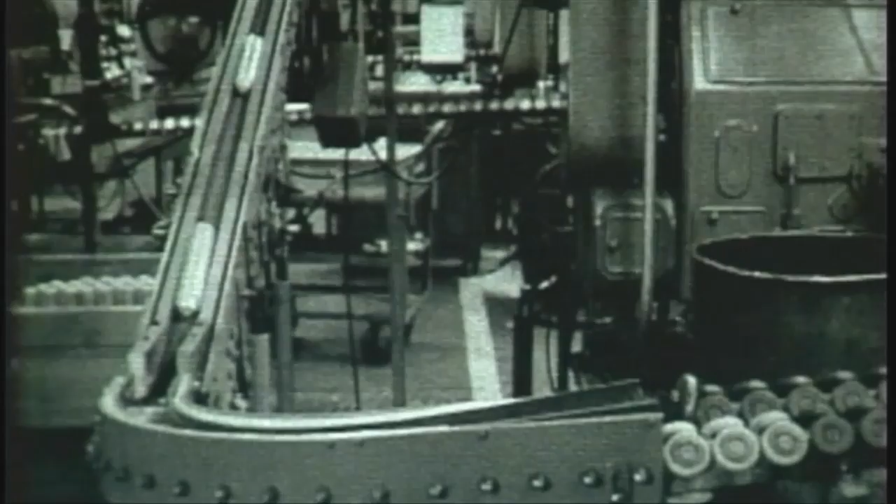We have a little bit of history here of Hanford and the issue with groundwater. A lot of people don't realize that a lot of the contamination that has gotten into the groundwater here at Hanford is due to purposeful release of contaminants to the ground back in the 40s and 50s when Hanford was an operating facility. About 450 billion gallons got put into the ground because at the time they didn't believe it was going to affect the environment - they thought it would just get hung up in the earth. Unfortunately, that was not correct.

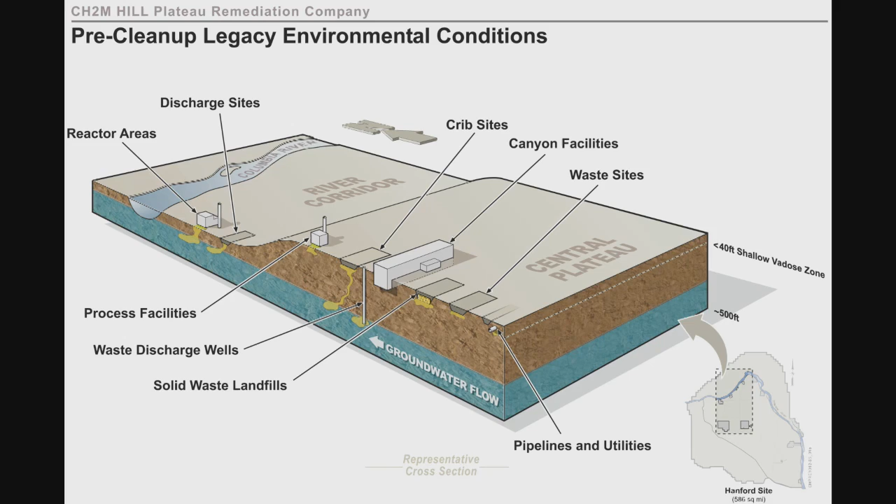A lot of that contamination has made it to the groundwater. It came through a number of sources. There were wells that purposefully injected contaminants into the ground. There are things called cribs, which are big open trenches where water coming out of the process facilities was dumped. This percolated through the ground and over time has reached the groundwater, which in this area is about 250 to 300 feet below where you're currently standing. It's created quite an issue, but that's a little bit of background on how we got to where we are today.

So this is a bit of an overview of the Hanford site, and this is the Columbia River - one of the primary things we're in the business of protecting, cleaning up these contaminants so they don't affect the Columbia River. Currently, you're standing in what's called the 200 West area. We're about 5 to 6 miles from the river, depending on which way you go, and a couple hundred feet above the elevation of the river.

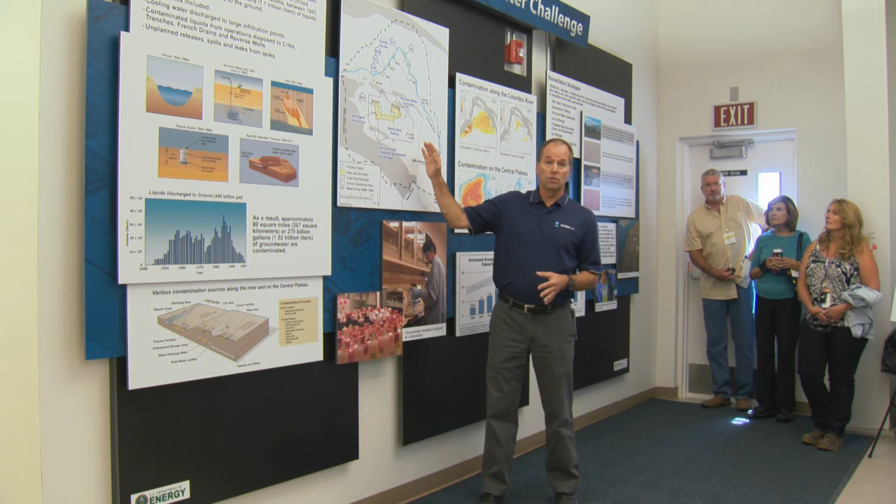As I said, the groundwater starts about 250 to 300 feet below us, so it's almost at the river level here from the plateau. Today I'm going to be talking to you about the cleanup effort we've got going on the 200 area plateau, but we also are doing cleanup along the river. I'll touch on that a little later in this tour - we've got 5 additional plants, so 6 plants total: the one you're in today, and 5 more along the river. Those are right at the river, cleaning up contamination that was caused during reactor operations from the 9 reactors that had operated along the river.

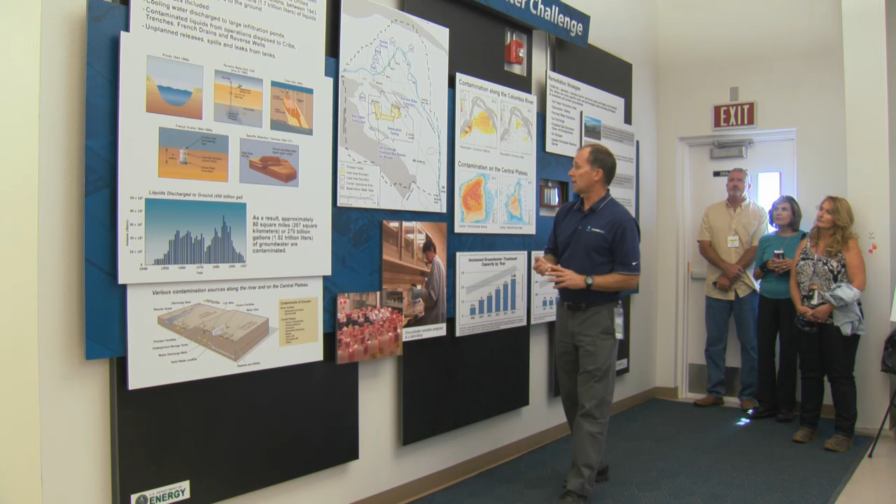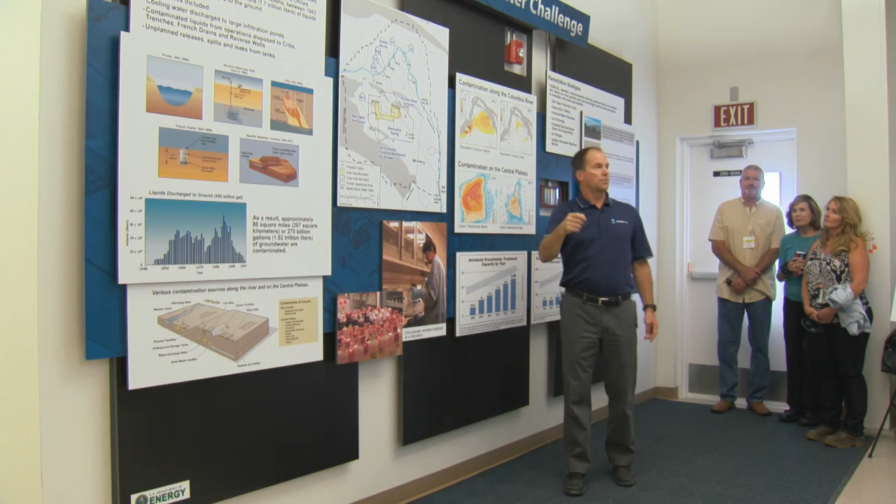So here's a bit of a chart, a cartoon, to depict the contamination we have. It's broken into 2 halves - this is along the Columbia River. What it's depicting is the way the contamination was determined to look back in 2012, when we kind of started a lot of this effort, or as we got into it. This is based on sampling, drilling wells and sampling the wells, getting actual data so we're able to determine where the contamination is.

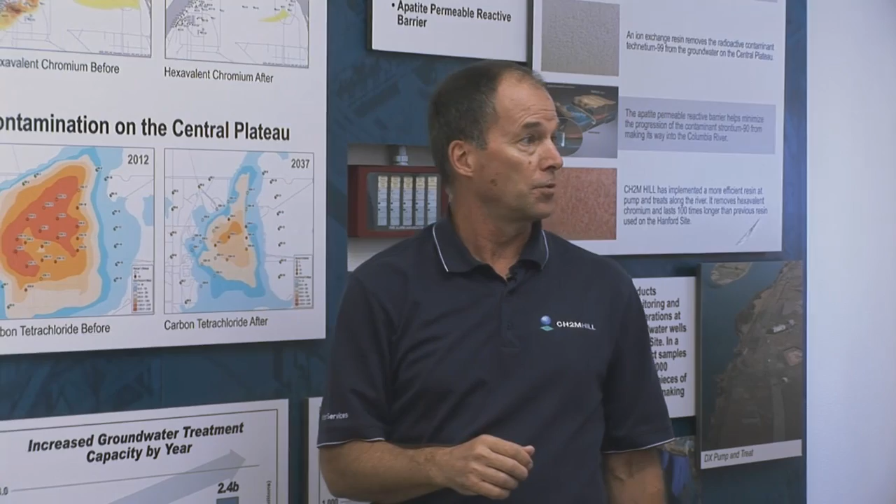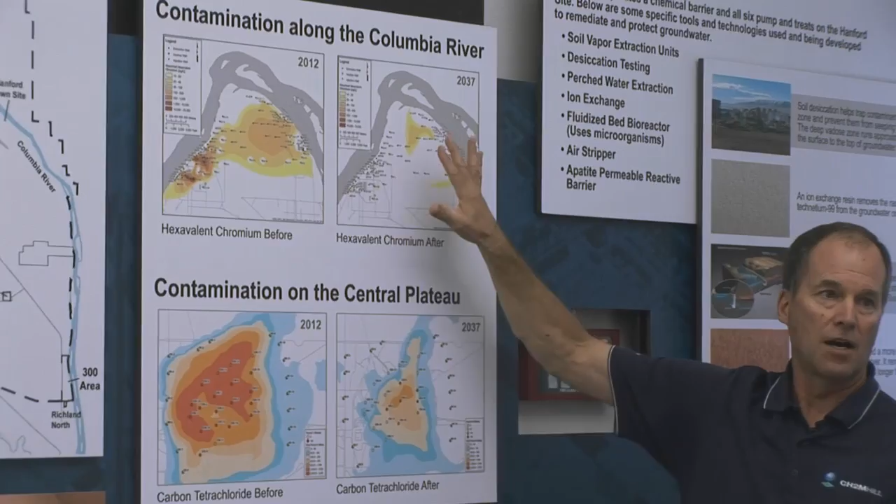Contamination along the river is predominantly chrome - hexavalent chromium that came from a chemical used in the operation of the reactors to prevent corrosion. It leaked out, got in the ground, and now we have it. The darker colors represent higher concentrations of the chrome. This is a model that projects out, based on cleaning up with the pump and treats, what it'll look like in 2037. In general, it'll be away from the river completely, so no additional chrome will be going into the river.

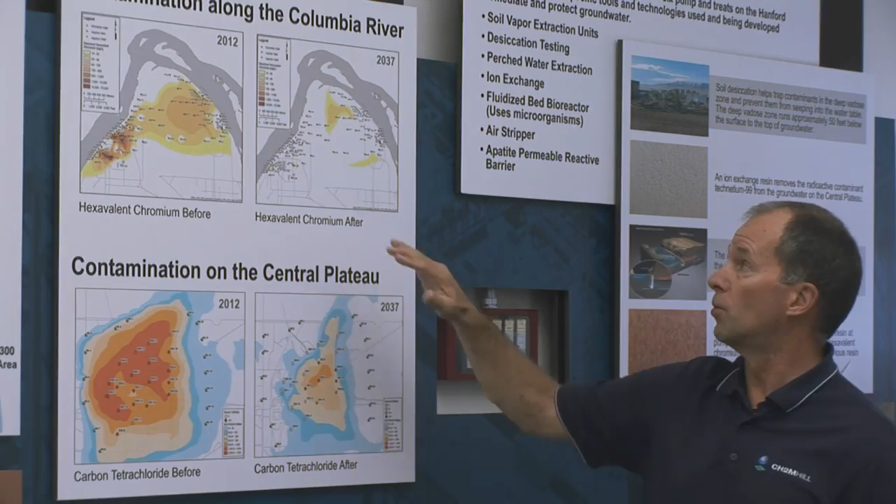And more importantly, it'll be below the drinking water standard, what's left at that time.

So at this point in time is roughly when we project that we will be done. Now, based on actual operation, we're actually doing better than that, and we think we're going to get the job done sooner because the modeling scientists and engineers tend to be a conservative lot, and they do conservative modeling, and the actual plants are operating better than the models projected.

This is the contamination on the Central Plateau. This is directly under you in the 200 West area. This is a depiction of the carbon tetrachloride contamination. The carbon tetrachloride was a chemical used in PFP when they were operating the facility. It was used as a cleaning and degreasing agent, and it was dumped directly into the ground at that time, again, not thinking that it was ever going to get to groundwater.

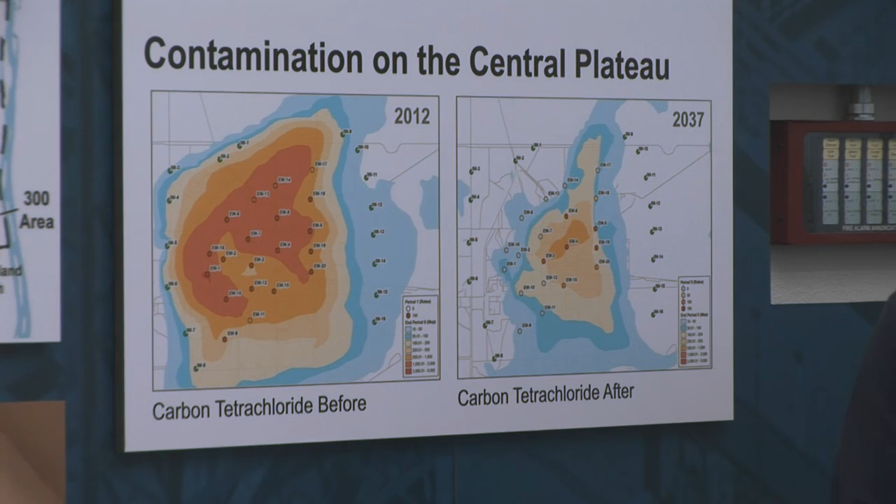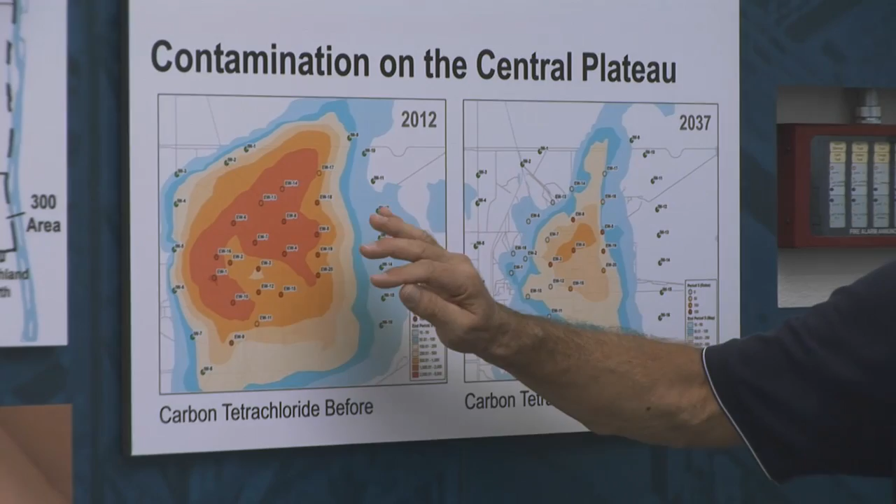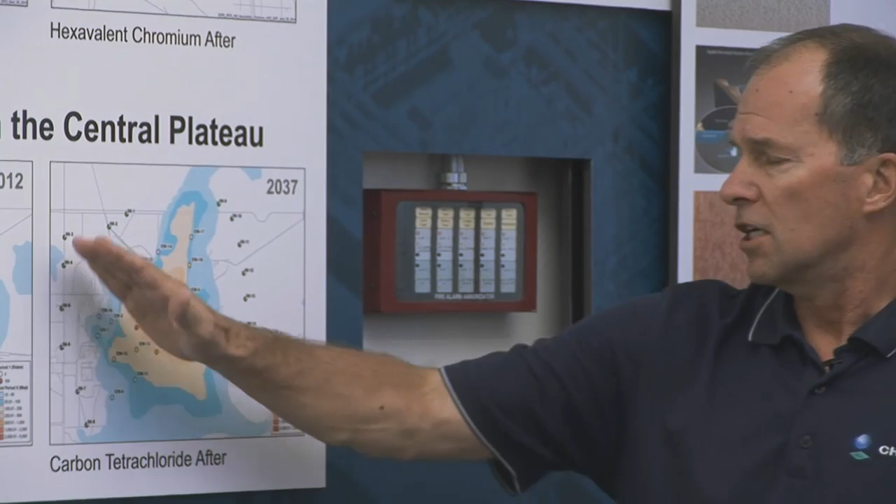We currently have a plume that's about 5 square miles of carbon tetrachloride, and this is not the only contaminant. As we get further into the tour, I'll show you some of the other information, but there are other co-contaminants: uranium, technetium-99, nitrate, also chrome. But for purposes of display, and also because it's one of the primary contaminants we're focusing on, we just show the carbon tetrachloride here. The colors represent different concentrations. In about 25 years of operation, the plan is to have removed about 95% of the mass of the carbon tetrachloride that's in the ground and reduce it down to a level that's very close to, if not at, the drinking water standard, and then the rest would be handled through monitored natural attenuation.

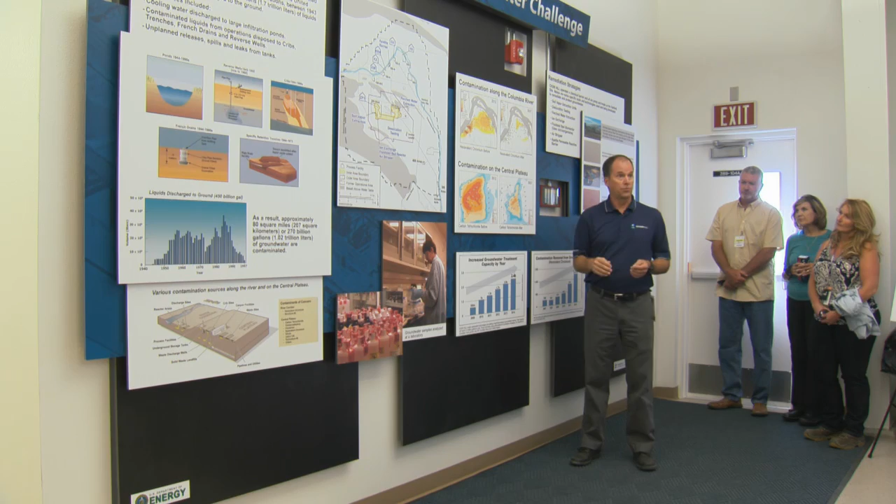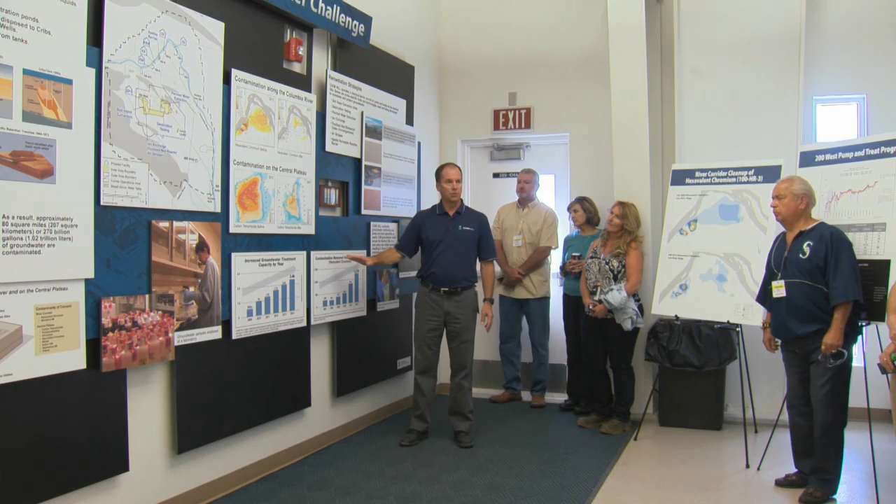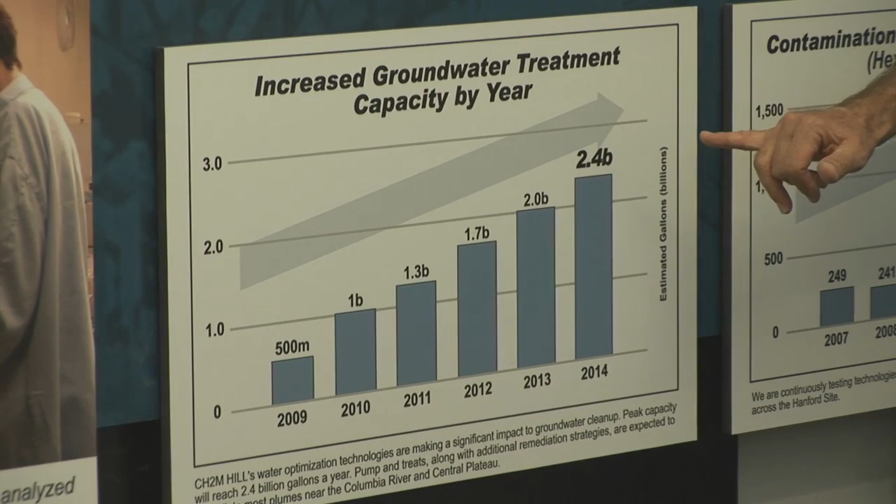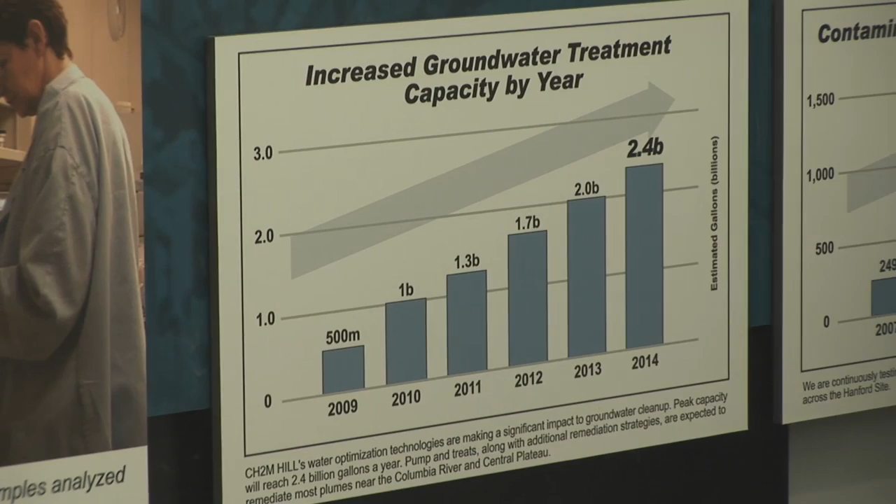This is a little bit of trying to show over the last 5 years with the funding we've gotten through the ARRA funding and other things, what we've been able to achieve since 2009. One of the key things in this treatment process is getting capacity to pump the water out of the ground, treat it, and re-inject it into the ground. We have drastically increased the capacity up over 2 billion gallons a year is what this represents in this year, and we'll increase it even more next year. So this is just kind of showing the capacity. It doesn't mean we're operating at that level today, but it shows what the plants can actually do, how much water they can treat and clean.

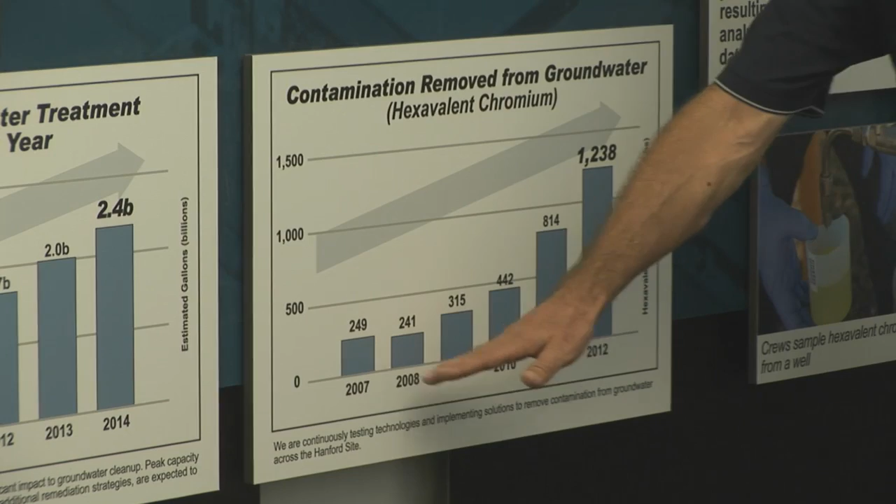This is also showing a little bit of a chart of how we have done so far in removing hexavalent chromium in pounds, and it shows back in the early 2007-2008 frame, moving a couple hundred pounds, and in 2012 we've removed over 1,000 pounds, and that level will stay probably close to that this year also. So we're getting a lot of contamination out of the ground.

To give a perspective on that, with chrome contamination, a grain of the chemical, about the size of a grain of sand or a grain of sugar, will contaminate about 8 gallons of water above the drinking water standard. So just one little grain of sugar, in a sense, dropping into 8 gallons, and it's above the 48 micrograms per liter state drinking water standard. If you think about that, and then you think of how many grains of sugar are in a pound, and then you say, well, you've got 1,200 pounds in 1 year that we've cleaned out, that's a lot of contamination that we've really pulled out, even though the number itself maybe to some people doesn't seem that huge. It's a lot of contamination that's been removed from the system.

And this just kind of, I always refer to our pump and treats as a tool. They're just a tool, like a wrench, like a hammer, that you can use to do something with. In this case, we sink a bunch of wells and we pump stuff out of ground. That's not the only way we clean stuff up at Hanford. We use other tools, if you will. And this was just a listing of some of the other systems we use.

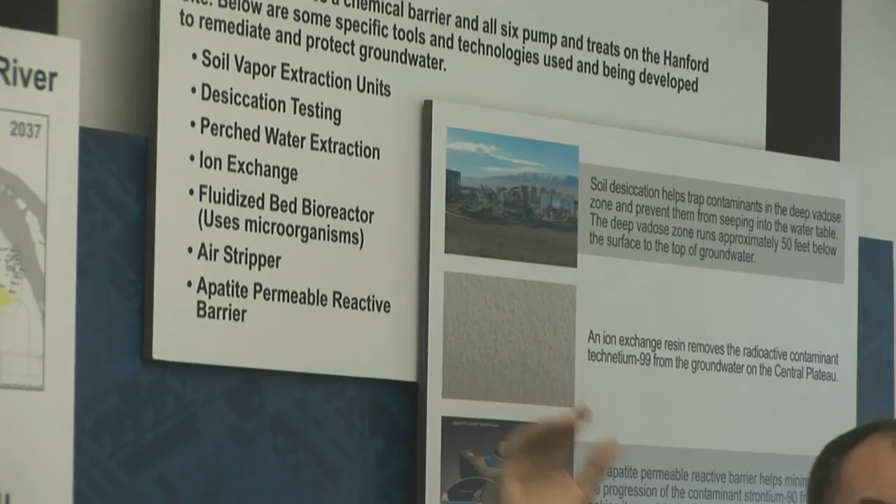The 250 feet of vadose zone, the dirt that's between us, where you're standing, and the groundwater, we refer to as vadose zone. And in this area, there has been a lot of contamination of carbon tetrachloride. And we have a soil vapor extraction system that's been operating actually since the late 90s.

It's removed about 80,000 kilograms, which is about 170,000 to 180,000 pounds of carbon tetrachloride from the soil column. So that's all material that never made it to the groundwater. That's a really good thing, because it gets harder to clean up once it's in the groundwater, and yet we're doing a good job there.

We're also doing other testing and other techniques to determine other ways to clean up other chemicals, to either clean them up or fix them in place. They're not currently fully being utilized, but we're looking at other technologies.

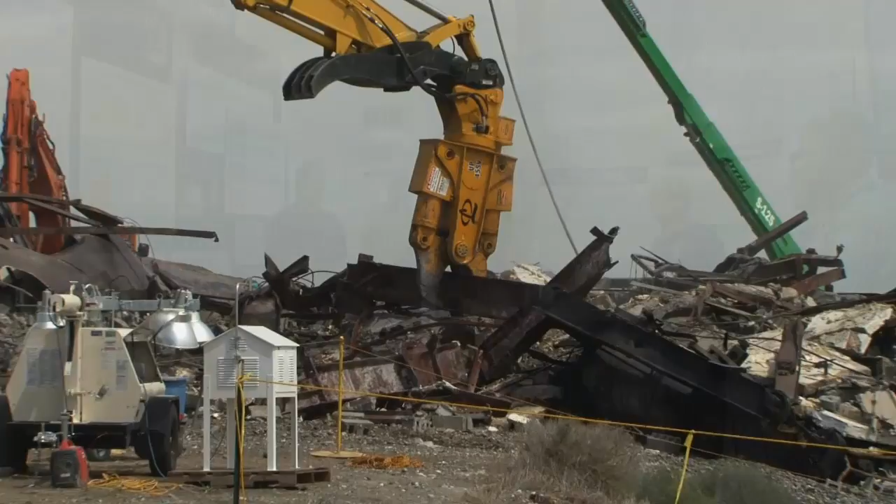I just wanted to touch on that to say, this is all about pump and treat today, but there are other tools we're looking at and exploring to start addressing things like the vadose zone, which is sort of the next frontier. We've dug up soil sites and cleaned them, we're taking buildings down, we're taking care of the groundwater, but if we want the groundwater to stay clean, we've got to address how to deal with the vadose zone so more contaminant doesn't eventually make it to the groundwater. That'll be a big deal next for us.

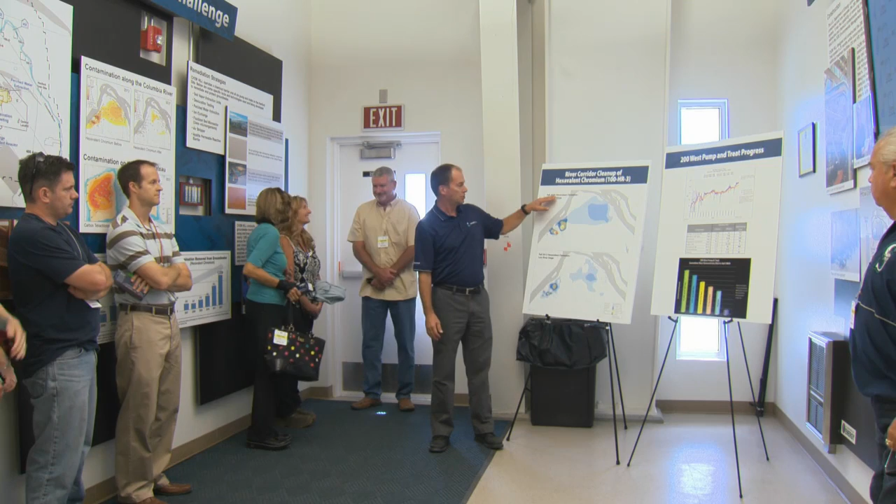I mentioned earlier, on this map, our projections to 2037, and I'm just going to touch on this. This is based not on modeling, but on actual sampling. This is in 2009 along what's called H Area. For those of you familiar with the Columbia River, it's what's called the Hanford Reach.

It's out where the D Area reactors are - there were two of them - and then H Area. White Bluffs, as a point of reference, is just down here off the picture. It's a wonderful kayak trip if you're ever looking for a great place to kayak.

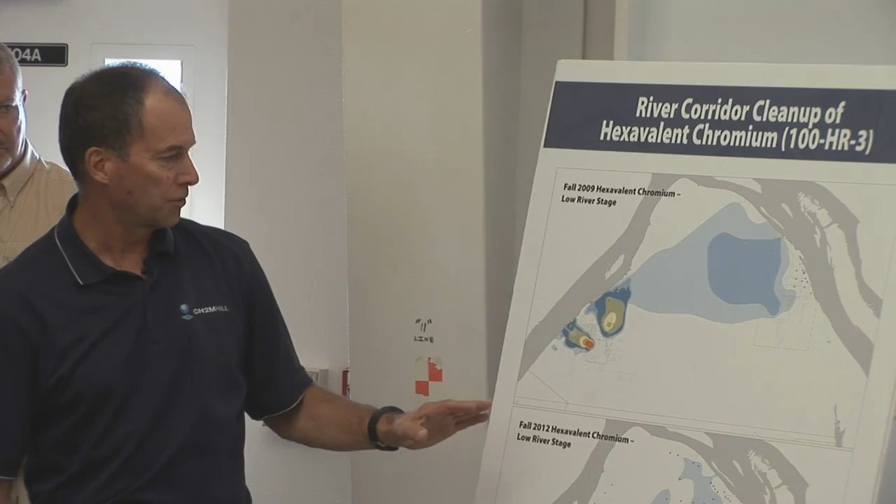In 2009, this represents hotspots where there's significant levels of chrome. The drinking water standard is 48 micrograms per liter. These concentration spots were well over 5,000 micrograms per liter, so significantly above the drinking water standard.

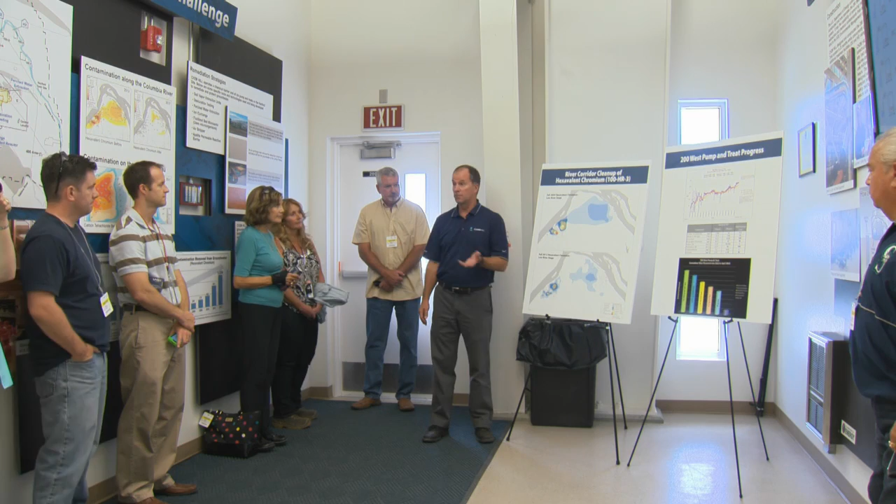In about 3 years now, we've knocked those down - they're still above the drinking water standard, but significantly reduced. We're really at a point where we're claiming that we've stopped the flow of chrome to the river. There are some legacy areas where the water isn't flowing very much, and that chrome is still located along the river, so you'll find it, but no new chrome is going to the river. We've pretty effectively pulled the plumes back now.

What this is really showing is that our modeling is conservative and the plants are working as well as or better than designed right now in cleaning up the chrome along the river. We should easily be able to make the 2037 goal, if not a bit sooner, to completely remove the chrome below the aquatic standard to prevent it from going to the river, at what's called 10 micrograms per liter. So I'm giving you a lot of information fast.

I hope it's okay. If you have any questions, please don't hesitate to ask.

I'm going to shift focus now more to this plant where you're currently at and where we'll be touring briefly. This plant was turned over to operations to myself and Mr. Barrett here back on June 28th - I remember the day well - last year. We've been in the process since then of bringing the plant up to full operations.

It was turned over for operations, but then you run through a series of operational tests to wring out all the systems for a final time, to finish training our operations staff, and to really ramp it up to full production. We're very close to finishing that process.

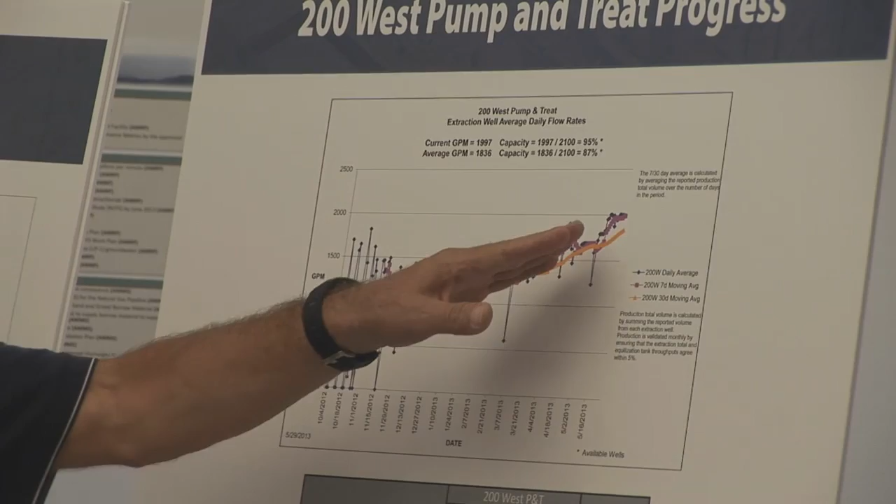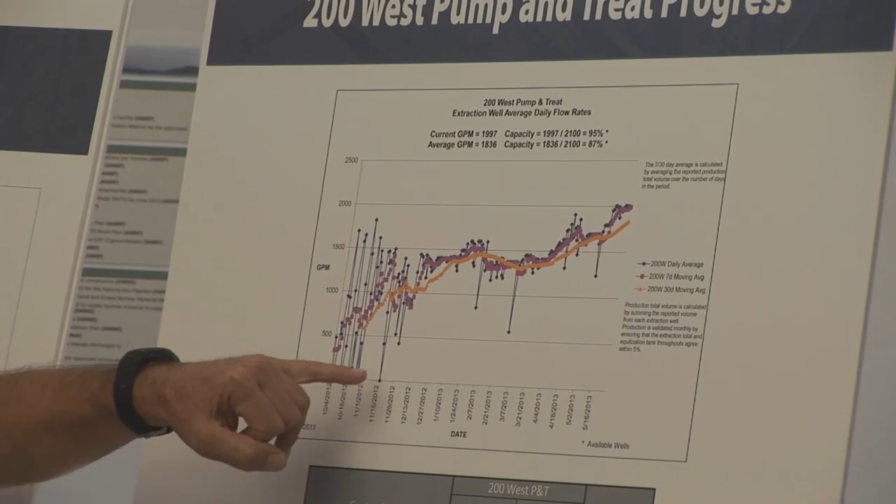We have this chart here. The main thing to look at is the orange or pink line, which shows back in last October the plant was operating at a low range of about 500 gallons a minute. It shut down frequently, which is why these lines dropped down to 0. Bill and his team have brought the plant up over this last year, where we're now operating continuously above 1,500 gallons a minute, with a goal this year of about 1,900 to 2,000 gallons a minute, which we've already achieved for one 30-day period.

We're going to make another one for DOE before the year's out. So the plant's coming up to speed. This plant is designed for 2,500 gallons a minute total, and in our operating range, it'll be somewhere around 2,400 gallons a minute. You're never at the total operating all the time.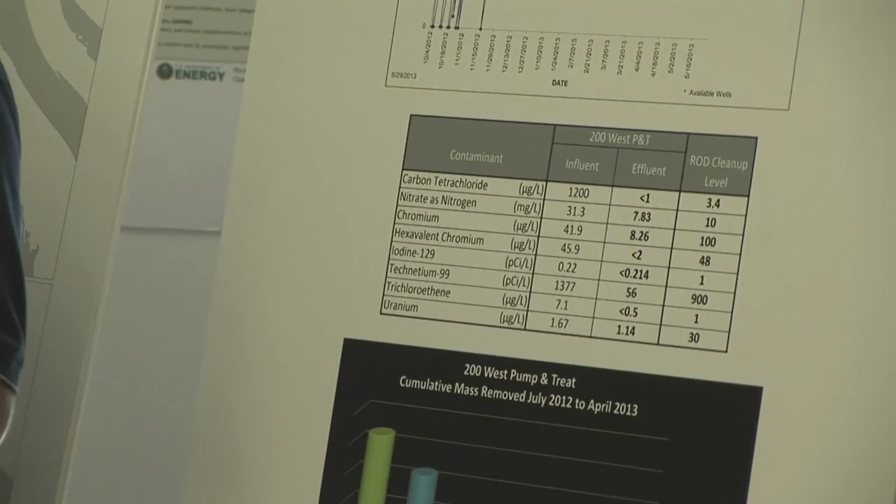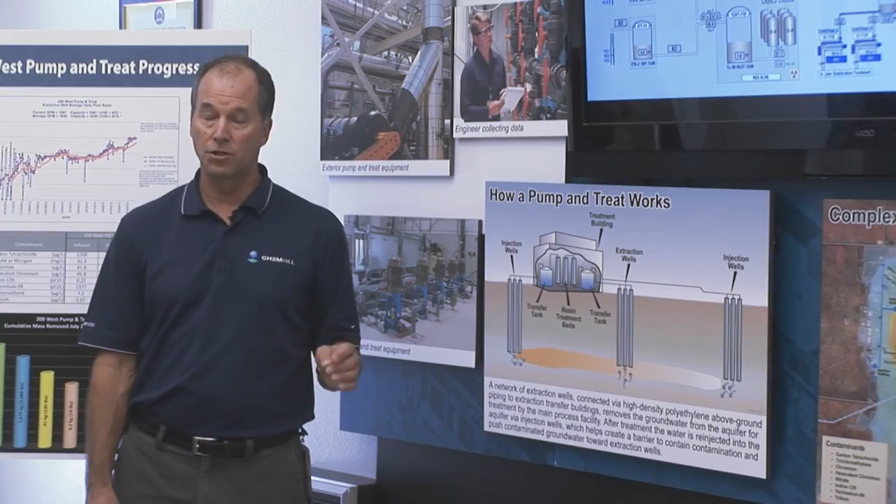I mentioned earlier the plants along the river are designed to take out hexavalent chrome, and that's all they're designed to do. So they're a very simple plant, and this cartoon shows conceptually how a pump and treat works. We take water out of the ground through extraction wells located based on the modeling and a lot of input from our scientists as to where to put them. It goes through a series of resins, which looks like sand, to give you an idea. It strips out the chrome, and then we re-inject it in the ground. So that's how the 5 plants along the river work. They only take out chrome.

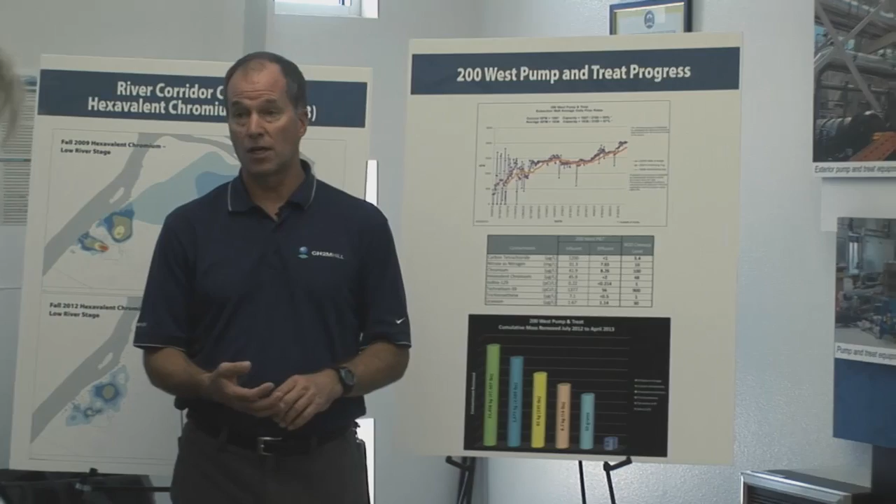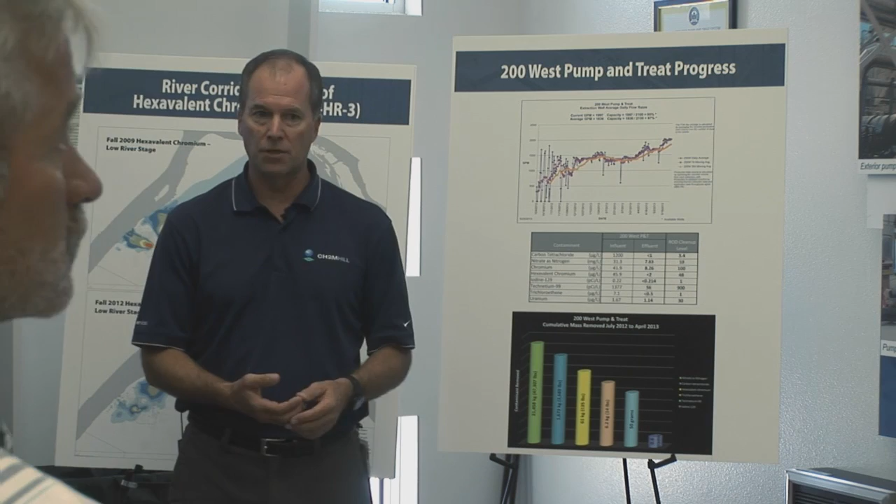That's what they're designed to do, but that's the main contaminant we're focused on down there. It's a lot more complicated up here. The Plateau has a mixture of chemicals. We have carbon tetrachloride, nitrates, radioactive contaminants such as technetium-99 and uranium, iodine-129. There's some chrome in the ground and some other metals from all the processing facilities up here on the Plateau. So this plant that you're standing in was designed to take out many more chemicals, and it requires a much more complicated system.

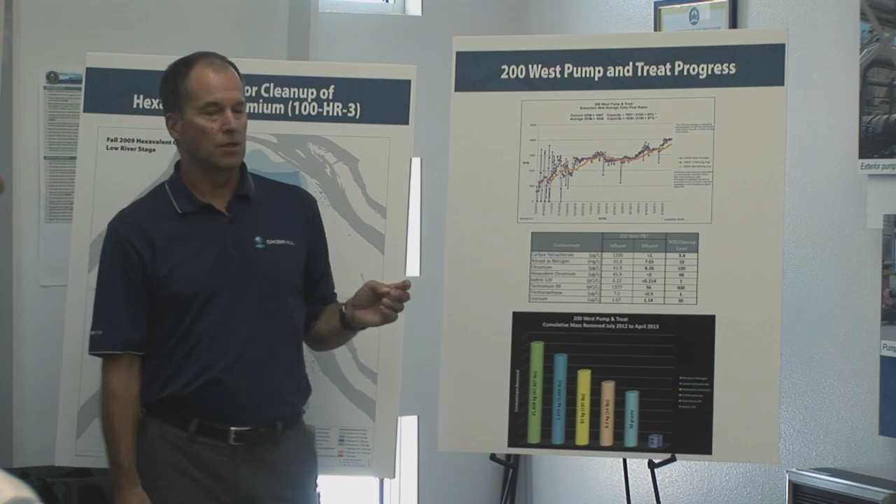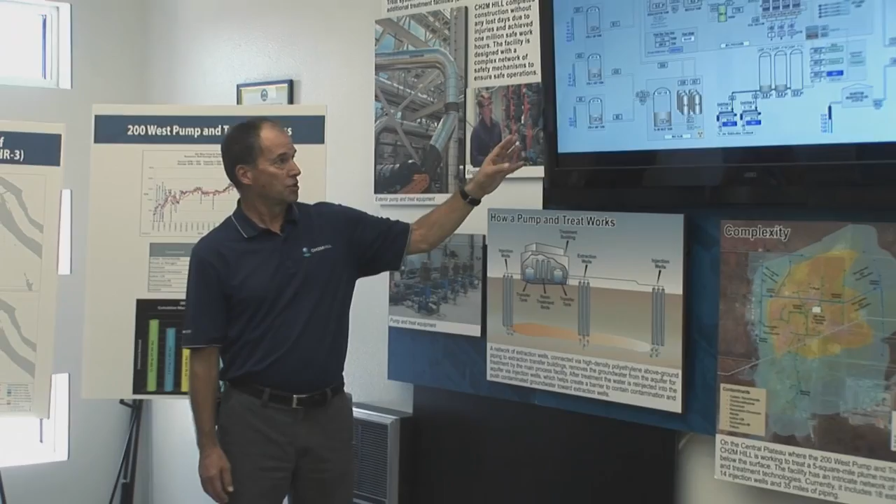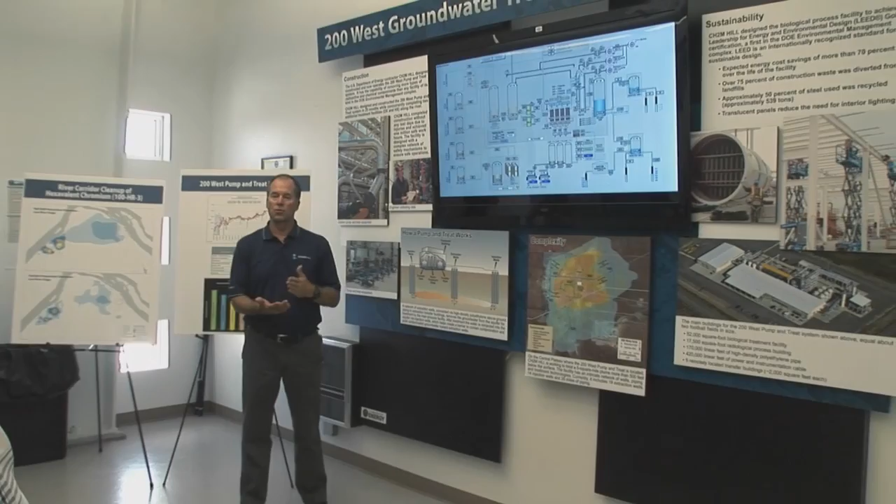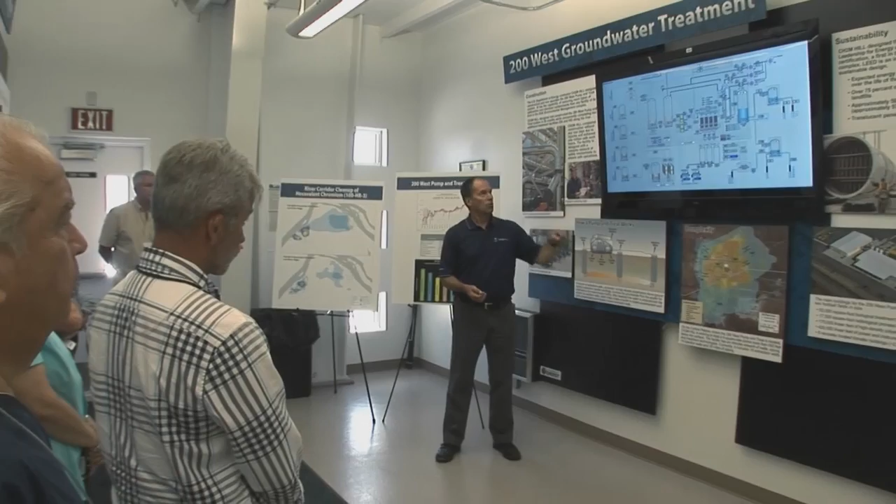So as we're walking through the plant today, Bill will be showing you some of that stuff, but this is what's called a flow diagram of the system here. If you look at the difference, this is the operating system for the river plants versus this one—it takes all of this stuff here to remove all the different chemicals. What we do is run the water through the plant in what we call series, going through various steps, and each one of those steps takes out a different contaminant of concern. When we're done, the water meets drinking water standard for all these chemicals at the moment, except for one, and I'll talk about that later.

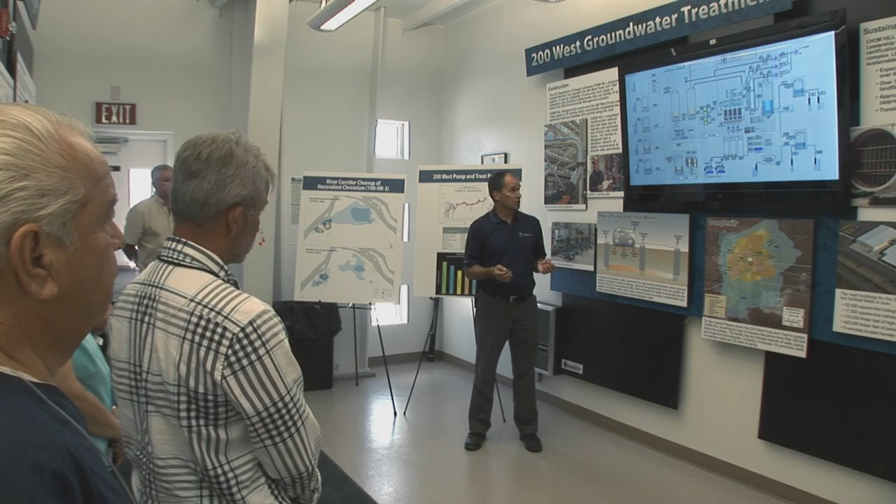It's re-injected into the ground below drinking water standards. So it's a plant that's been designed in the last really 3 years. It was constructed in 2 years, and we've been operating it now for just over a year, and we're about ready to finish with our operational test, so it'll be full operations after that.

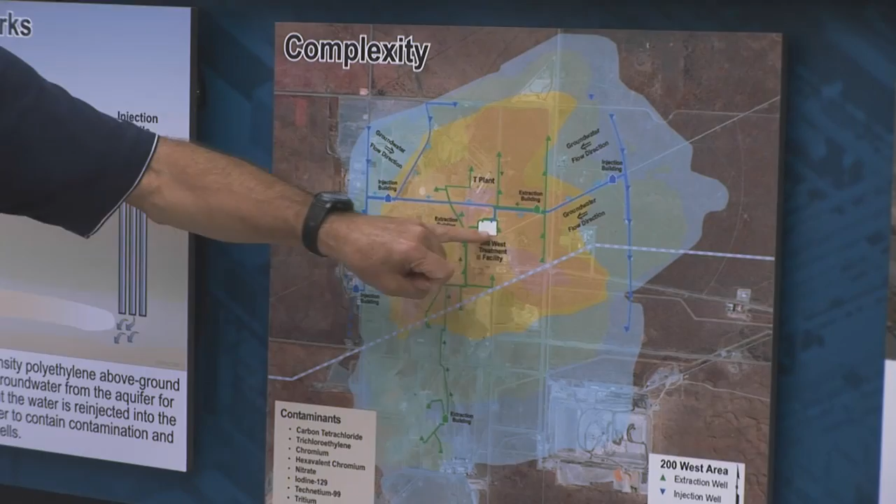What we do is we have a series of wells. This is the same plume we showed over there with the carbon tetrachloride plume, the 5 square miles—this is where you're standing right now. So what we did is drill wells that are 500 feet deep to the bottom of the groundwater, because carbon tetrachloride is heavier than water, so it tends to sink over time. These wells go all the way down to the basalt.

And we have a series of extraction wells. We currently have 18 operating extraction wells. We just drilled 3 more, but we're not hooked up to those yet. And we have 14 injection wells.

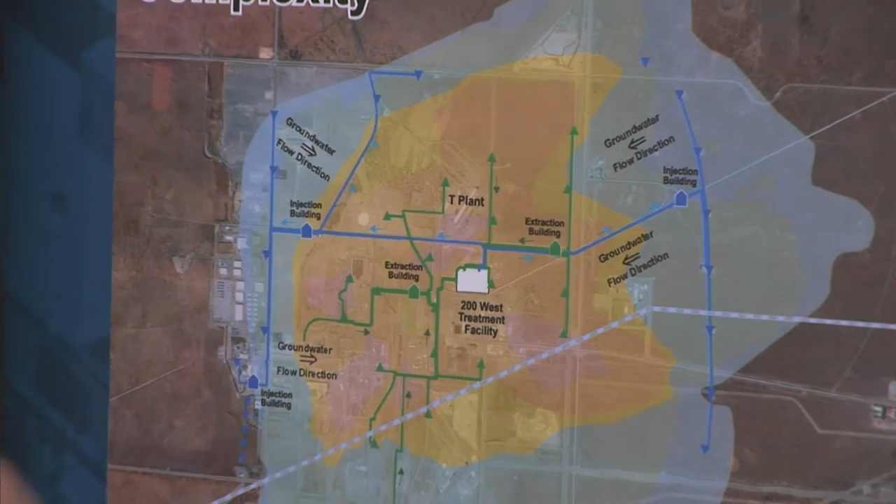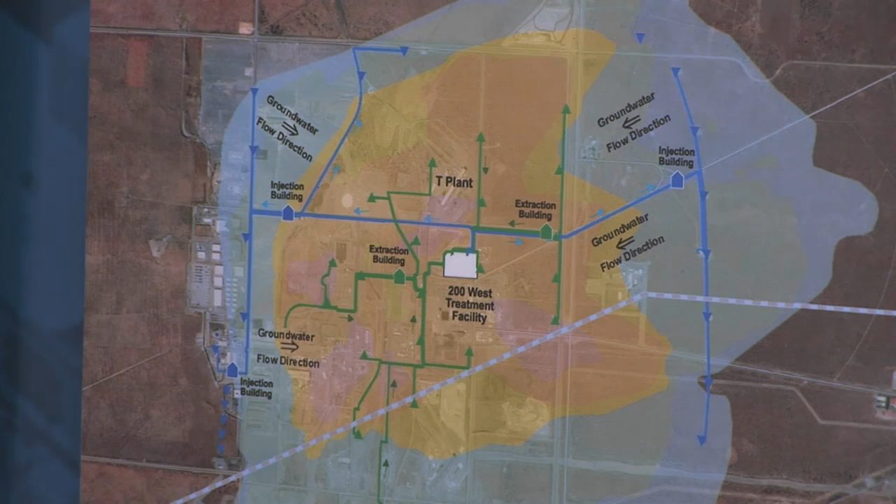So in this particular case, we've got kind of a nice bullseye plume in a sense—it's an easy one from that standpoint. We put the extraction wells in the middle of the plume and extract water out. And these blue lines and dots here represent all of our injection wells. So we inject water back into the groundwater, both upstream of the natural flow of the plume, which is towards the river, and downstream. The purpose of that is to create a bowl effect. We literally lower the groundwater by a few feet in the middle of the plume and raise it up along the outside, forcing the contaminants over time towards the middle.

So what that will do is one of the key things we want to initially do when we're treating groundwater, before you actually worry about removing contaminants from the ground, is to stop it from flowing towards the river, or stop it from where you want it flowing from.

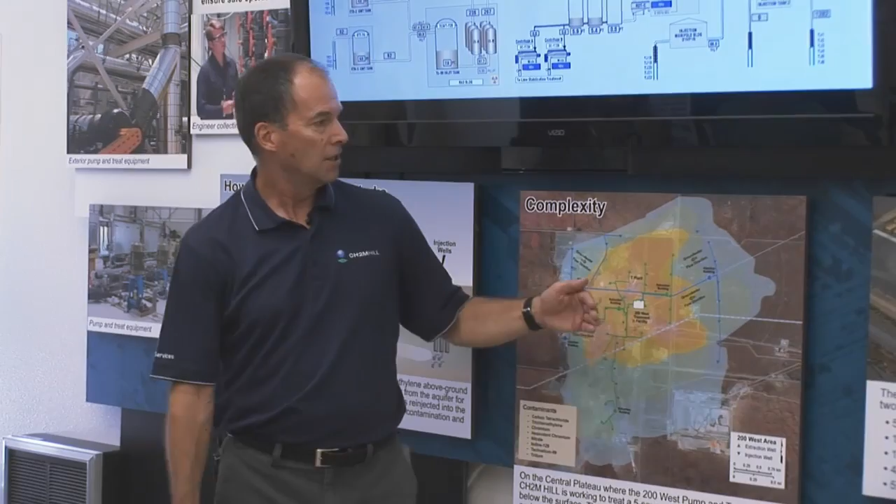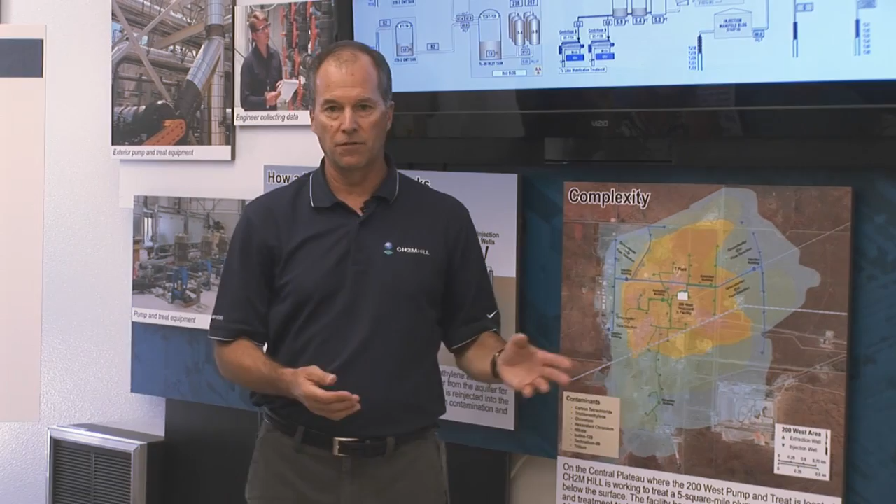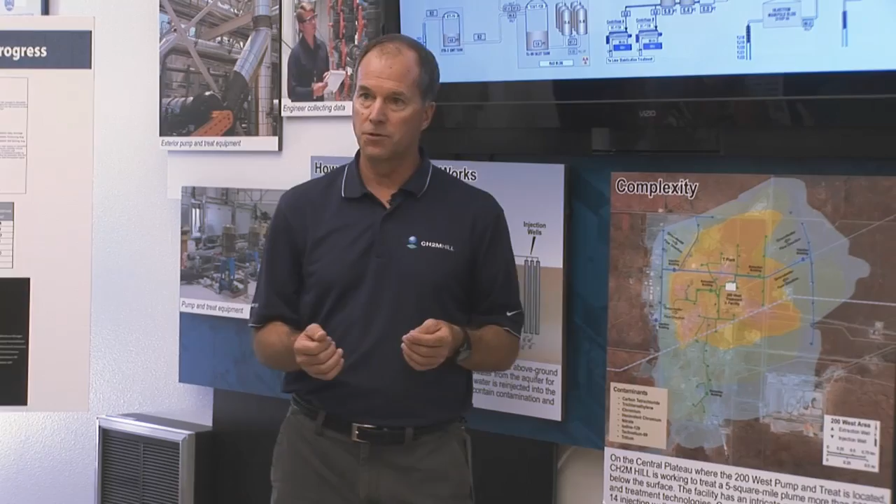So the system's working again as designed, which is a really good thing, and we're not yet up to full capacity. Did I answer your question on that?

Okay, thank you. So just a little bit about the facility, and then I thought we could go ahead and take a tour of it, because that's kind of the fun part.

It's been designed over the last few years, and when DOE asked us to get started on this back in 2010, one of the requirements they had was that it meets a thing called LEED, which is Leadership in Energy and Environmental Design. It's a U.S. Green Building Council standard for really saying how efficiently do you design and build a facility. And when I first heard of LEED, I thought it would be like a lot of things are, where it's how much insulation do you have and all that, but it's much more comprehensive.

It says not only how efficiently does a facility operate, but also how did you build it? Did you recycle material? Were you careful not to use things that might be short in supply, if you will? Were you efficient in transportation? And so it's quite a challenging standard to make.

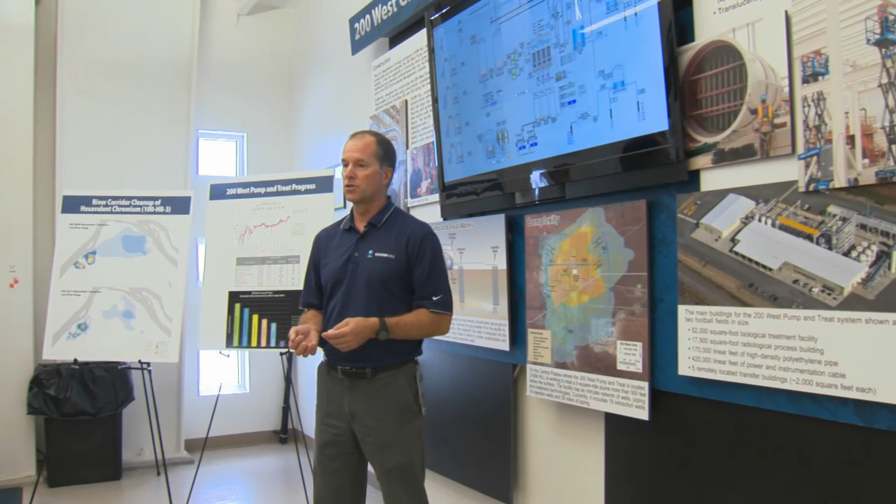And this facility, the bio building that we're going to go into first, was certified as LEED Gold standard. It's on the wall over here right behind the cameras, but basically it was the first facility within DOE that's an industrial facility to be certified that way. And as far as I know, we're still the only one. So we're kind of proud of that.

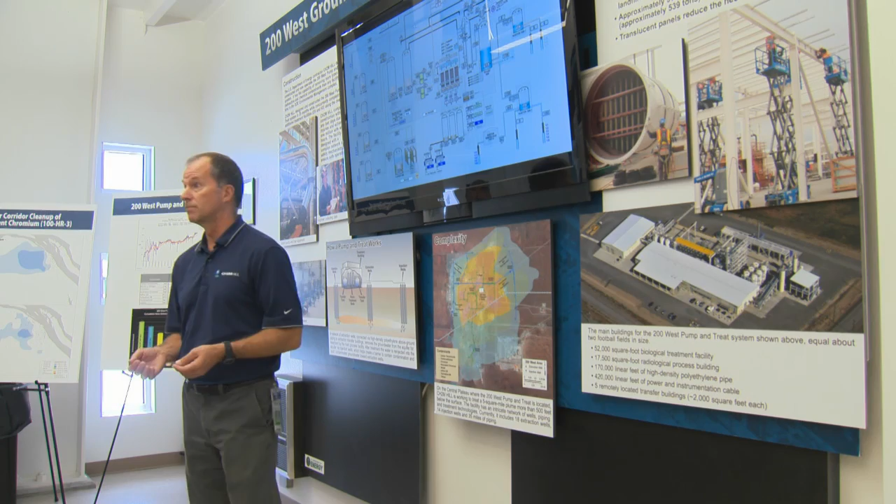It's been good. We've also received some other awards, both from the Project Management Institute and also from the Department of Energy, the Secretary of Energy's Award of Achievement. So the facility was built collaboratively with the Department of Energy, working with the regulators to get it done in a fairly short time period.

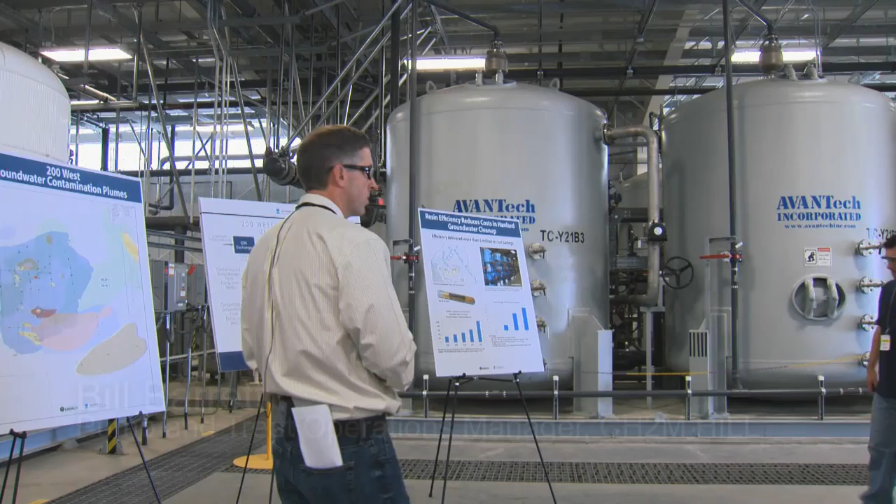So we're in the Rad Building right now. That's what we refer to it as. And it's a radiological building. This is where we remove technetium-99, which is a fission product, a remnant of the production days of Hanford. Most of those have resulted from tank leaks over the years, and cribs like we talked about earlier. But currently this facility is removing Tech 99.

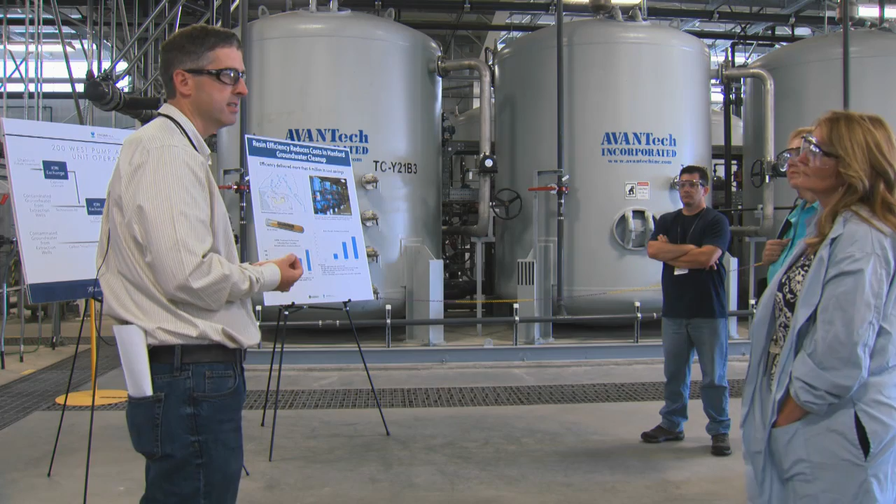And you can see these large gray containers right behind us here. Those are filled with a resin that's specifically made for Tech 99. And this concrete slab you're standing on, you can see it's in sections. That's designed for future expansion. Tech 99 is in this area of the site.

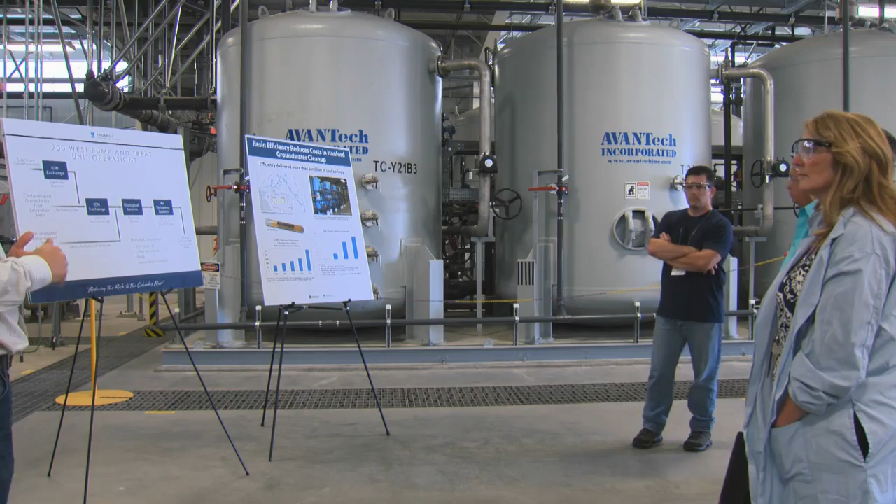And over here we have a uranium plume. And we will be in the future putting additional ion exchange vessels in here to treat uranium plumes in the future. So right now, all the water that comes into this building goes through that large tank behind you and goes through these vessels of resin.

And resin is more or less a polymer or a plastic bead that is about the consistency of a grain like couscous, and it absorbs all the Tech 99 in the first vessel. The second and third vessel of resin are just for backup continual polishing. When we first started up, the first vessel was removing 100% of all the technetium that went into it. And now it's been in service for over a year, and it's still removing over 85% of the technetium. The second vessel, of course, removes everything beyond what we can detect. And then the third one is available after that.

So we've been in service for over a year, and we don't anticipate to do a resin change out until maybe next summer, maybe longer.

So it's been performing very well. This is, generally speaking, Tech 99 comes into a tank in the building, goes through an ion exchange system, and that removes all the Tech 99.

The water still has nitrate in it, so that goes on to the biological part of the plant that consumes all the nitrate. Some of our wells don't have any radioactivity in them at all, but they do have nitrate. So all of the wells that go to this plant go through the biological process to have nitrate removed from it.

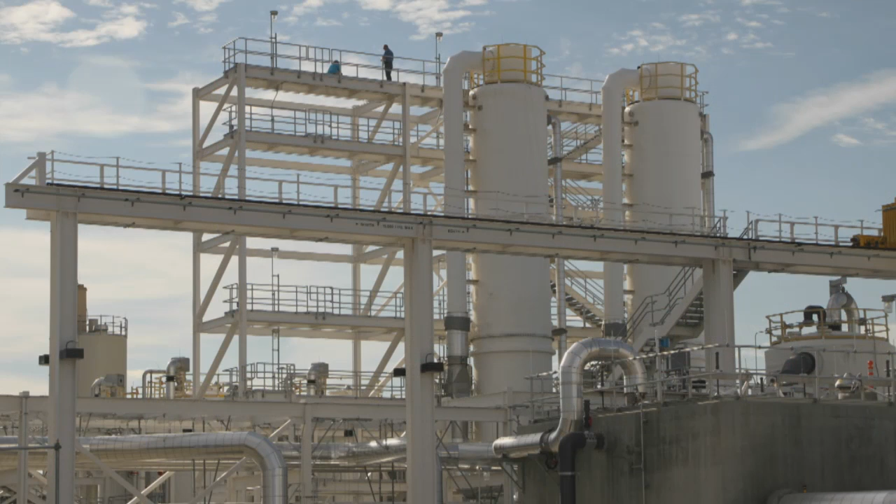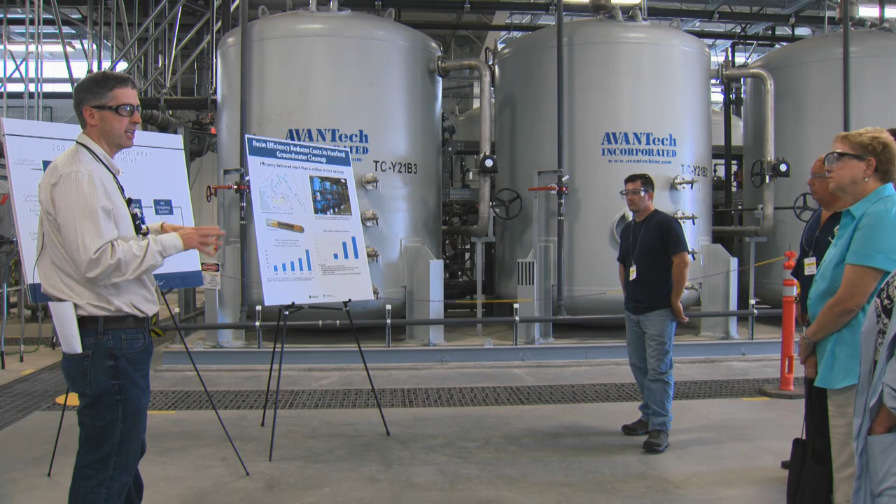After the nitrate's removed, we still have carbon tet in the water, and that's removed by a stripper tower, just like you'd see in a petrochemical plant. Water falls into the top of this large vessel and is atomized like a shower head almost. Then air flows up and strips off any volatile chemicals like carbon tet.

And then that's absorbed onto activated carbon, which is shipped off site for regeneration, and then it comes back to us. So that's a closed loop system also.

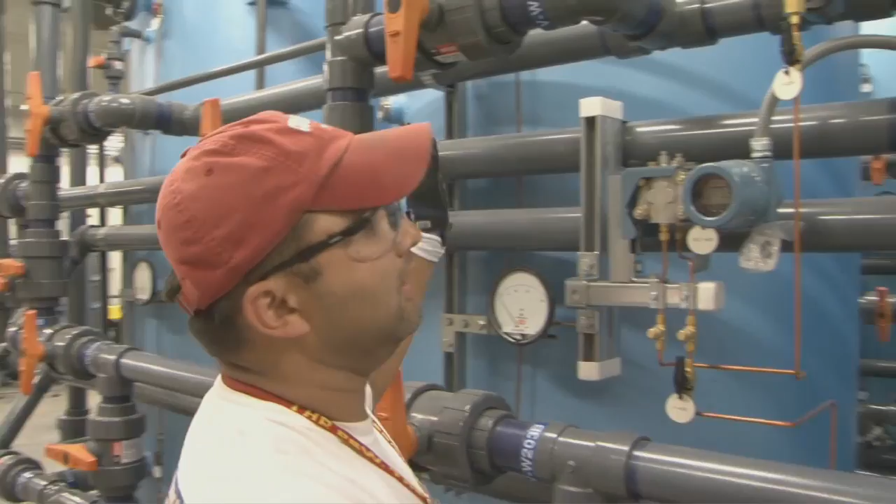If you ever have a chance to go along the river, this is what our vessels look like where we treat chrome, a little bit much smaller than these. Each one of these 4 vessel trains, as we call them, treats about 100 gallons a minute, between 100 and 140. These are designed to treat 400 gallons a minute.

Right now, as we're standing here, when we walked into the building you might not have noticed, but you passed some flow meters by that large tank, and we're treating over 500 gallons a minute right now in this building for contaminated water. Overall, we're flowing about 1,600 gallons a minute through this plant right now.

So what Bill was describing to you with the building we just came out of, that's what we refer to as our radiological cleanup building. What happens there is any of the radiological contaminants are taken out.

I mentioned earlier that there are about 18 wells that we extract groundwater from right now. Of those, about 4 or 5 have radioactive contamination, so only 4 or 5 of the wells go through that building, around 500 gallons a minute, roughly. The rest has chemical contaminants like carbon tetrachloride, some chrome, and other constituents like nitrate.

And those wells actually come in right here in this long metal support bracket, you see those black pipes. That's all piping coming in from the 30-plus miles of piping we have across the desert to the various wells, bringing in the rest of the water. So in nominal terms, we'll have about 2,000 gallons a minute coming in through these pipes, and about 500 from that have been treated for radiological contamination.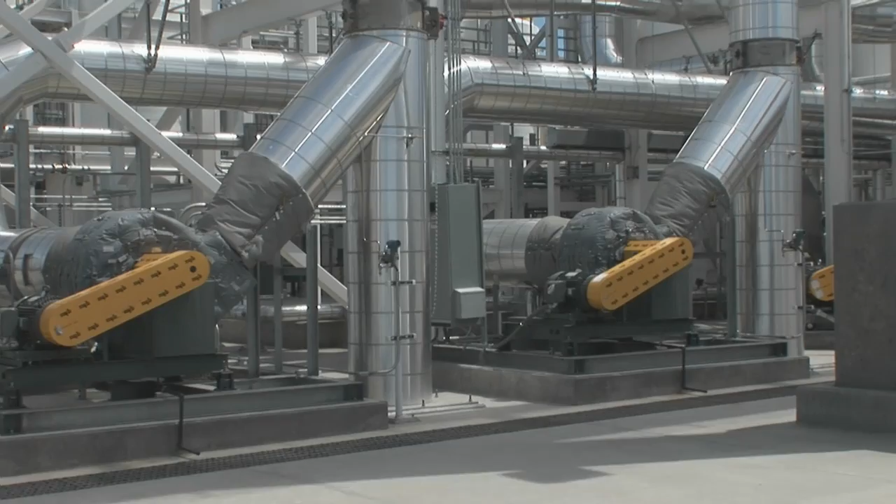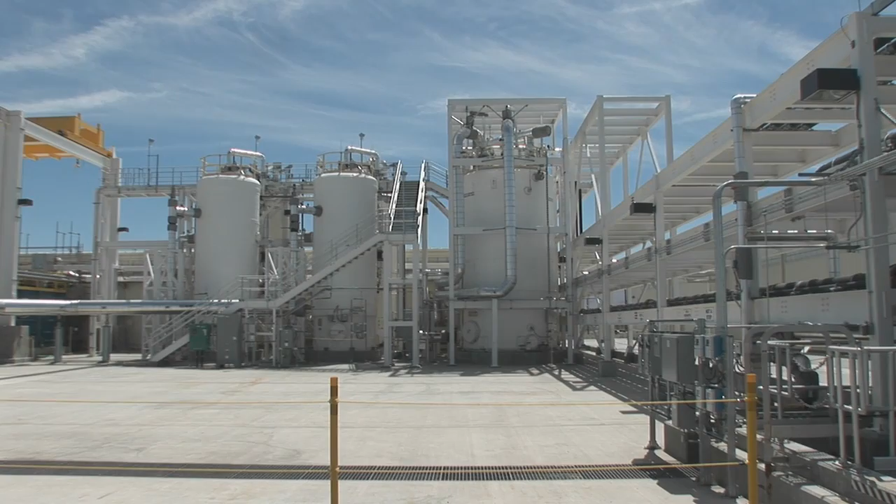The biology is that the microbes want oxygen, and we put them in an environment that does not have oxygen, or not much oxygen. So when the water comes through with the nitrate and carbon tetrachloride, they grab the oxygen molecules off of the nitrate and release nitrogen gas, and they break down the carbon tetrachloride too, we're finding out to some extent. So the nitrate in the ground gets broken down into nitrogen and oxygen in these facilities, these fluidized bed reactors.

And then the water continues from there. Now this is the full 2,500 gallons a minute when the plant is operating at full capacity. It goes through those systems to take out the nitrate, and it takes out some carbon tetrachloride. It then goes to these blue containers over here, called membrane bioreactors. And those are giant filters.

The bugs that get used up, we refer to them, the biological microbes, as they get used up and spent, they stay with the water flow and go over to those blue containers over there, where we have large filters that filter out all the solids, including all those spent microbes.

So what happens is the nitrates are removed here, some of the carbon tetrachloride is removed here. Then when it gets into these blue containers over here, some of the metals come out and all of the solids are filtered out. And then the remaining water—I'm going to walk down a little further so we can see it—goes through those tall towers over there.

To separate it from the water and make it easier to strip it off the water, we pump the water up to the top of those towers, and it drops down through a series of what almost looks like ping pong balls. Those whole towers are full of these ping pong balls, and as the water goes around those balls, it becomes a very thin layer.

We also pump air in through the bottom of those towers and suck it out through the top, so the air is going up and the water's coming down, and what that does is allow that carbon tetrachloride to be evaporated or stripped off of the water. So it actually evaporates the carbon tetrachloride as the water's coming down, and then that carbon tetrachloride is in a vapor form.